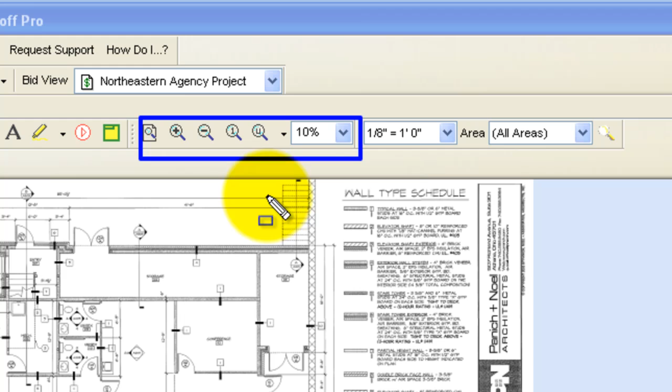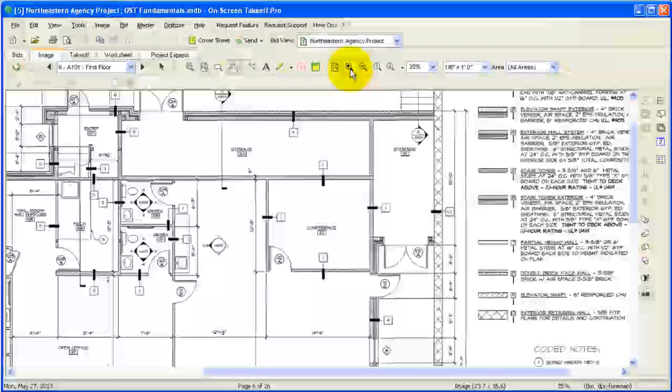If we're wanting to just zoom in incrementally, positively, what we do is click on the positive, and you can see the plan is zooming in right where we're at. If we want to move the plan, we grab this little hand for the pan and move over, say we're going to zoom in on that conference room again. So we center it up, and then we just keep hitting plus until we get that to a level that we can start to understand enough about the details of that room to be able to do our takeoff. If we want to move back out or zoom out, you just hit the negative and you zoom back out.

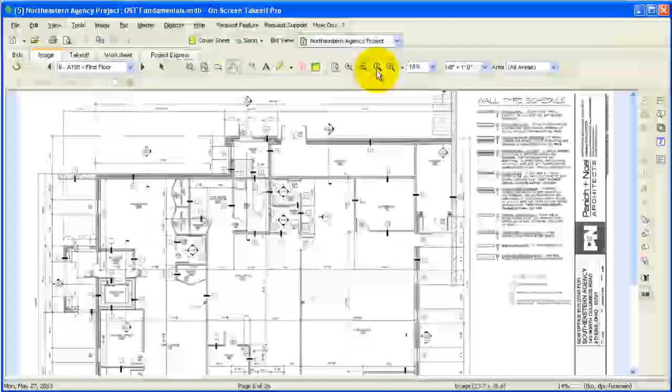The other zoom feature is when you're getting ready to do takeoff, there's a factory preset where you can just zoom to 100, and it zooms in to a nice level to be able to start doing your takeoff. The other is where you can have a custom zoom. That's where it has the magnifying glass with a U in it, so that's where the user sets up what that is. In this case, it's set up at 25% specifically.

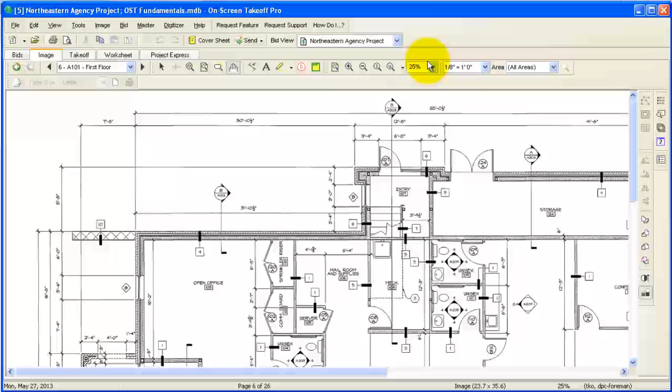And if you have a zoom setting that you actually like, that you're working with, you just click on that down arrow and set the current zoom as your custom zoom. And then there's some presets over here where you can just jump around to these different percentages to see which one you like the best. So those are the icons.

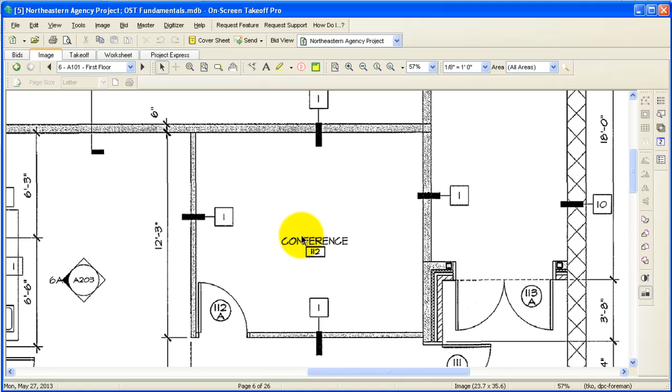One of the things I like to do is always click back here on the zoom full page, and then I like hitting the control button. Let's get back on this select feature. So if I want to zoom in on this room here, I'll hit control, and then I'll highlight that conference room, and it'll blow it open to the zoom level that I need in order to see the detail of that conference room.

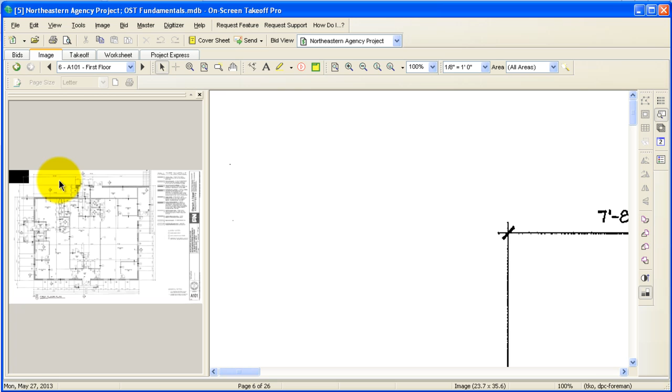The next feature is the pan feature, and we've kind of looked at that briefly, but to go into slightly more detail, let's go back to this zoom full page again, and we can actually open up that hide/show pan window. So that's where if we use our custom zoom, you can see that we're zoomed way into this upper corner, and then you can grab that hand and pan across the drawing to get to where you would want to stop and maybe look at a detail or start your takeoff or finish your takeoff or whatever you're wanting to get familiar with the plans about.

One other tip is if you haven't done much work with on-screen plans, I'd recommend printing up a half-size set so that you're still weaning yourself off of the paper set, but it's also giving you a little bit of comfort level to be able to jump back and take a look at your half-size set. So you can use the half-size set in conjunction with your on-screen takeoff.

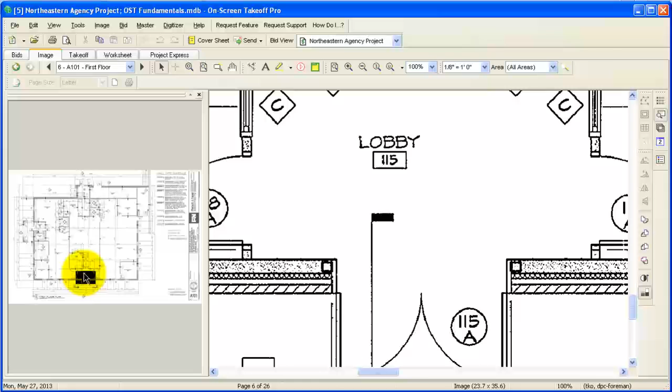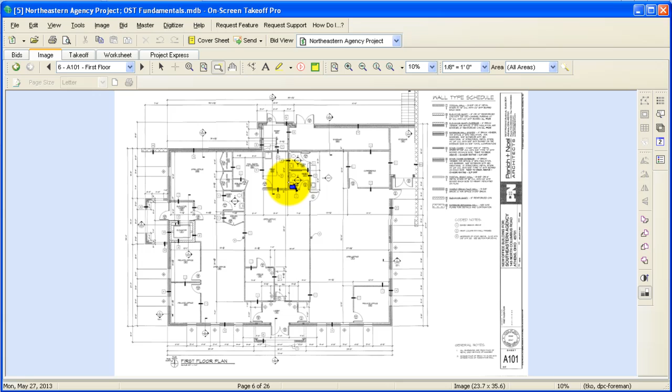Okay, so I'm going to close that pan window and go back to 100%. The next item I wanted to mention is the magnify tool. You click on this feature, and I like this specifically, well, you can use it in a lot of different ways, but where I like it is you can magnify when you're checking the scale on a plan. You can open up that area and tell what kind of scale the whole plan is, or if you're wondering what that detail call out is, you can get onto the magnifying glass and it brings up a lot more detail. I think that's a pretty slick feature. I use that quite a bit, probably several times on each estimate. So that's a nice feature.

The next tool is the zoom or magnify icon. To use that, you select it or click on it, get over onto your plan, and then hold down the control key and use the wheel on your mouse. You scroll up to zoom in, and you scroll down on your wheel to zoom out. That's kind of a cool feature. And then without hitting the control button, you can select that icon and then select the area that you would like to zoom in on.